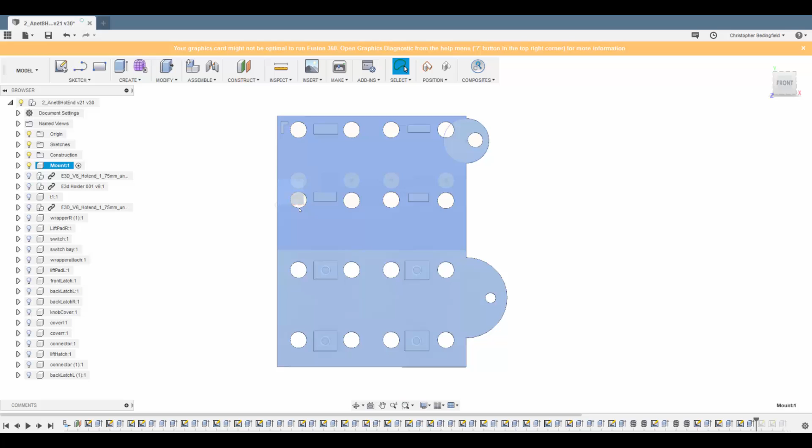So this bracket mounts to the two X brackets that are on the Anet. This is the bottom X bracket. There's a single one in the middle, and I'm just going to mount it to this side. And there's two on that top spindle, so this is going to mount there.

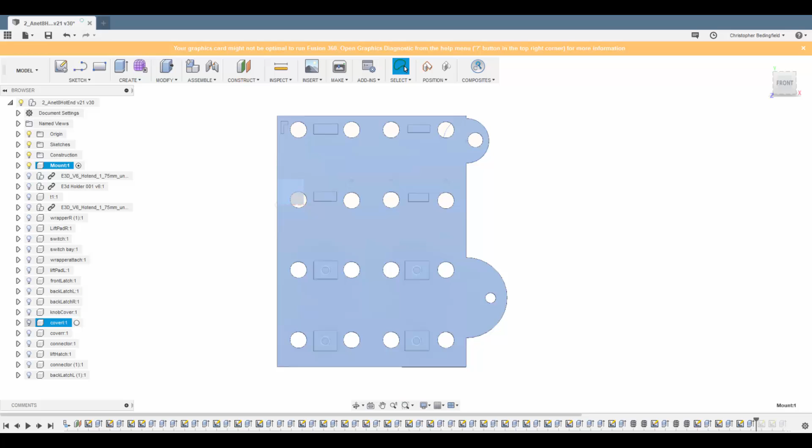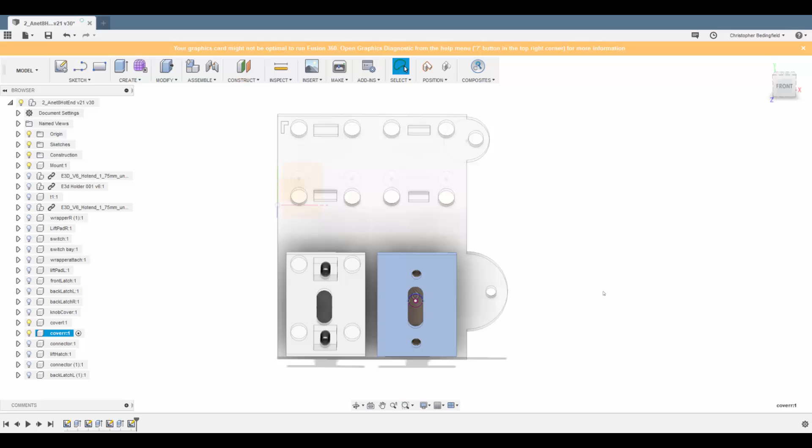And then what we're going to have, so I can do this correctly, we're going to have a cover which is basically going to screw into the mount. There's a left cover and a right cover, and this one has a wider hole. If you look at it from the front, you can see this hole allows for a lower position, and this hole, as you'll see in a minute, is going to allow for a fixed position. So this is T0 and this is T1, or extruder 0 and extruder 1.

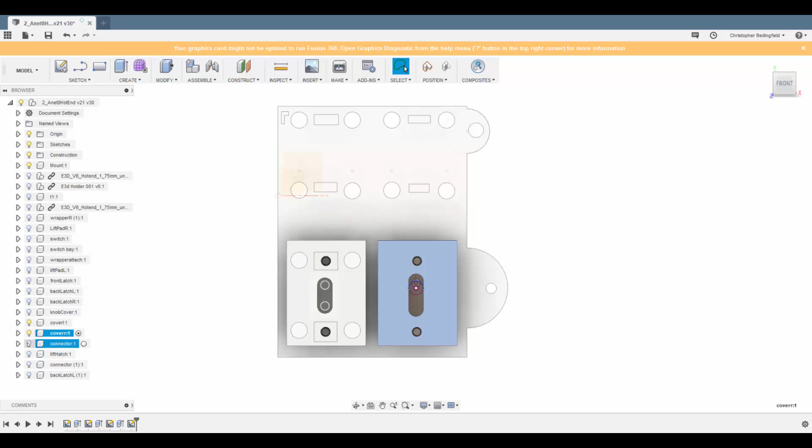This will be used for PVA and supports, or dual color, whichever you want. So now we'll show the connector. This connector has two holes that will go through, and that's why this is a fixed position.

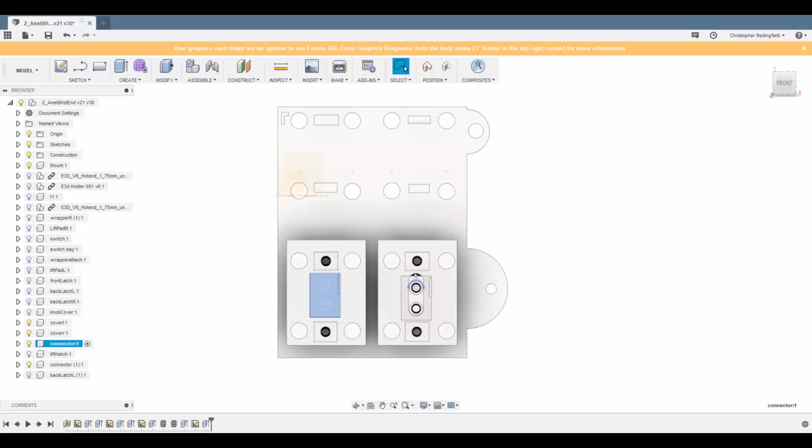And if we look at connector 1, you can see that it can slide up and down. At the bottom position it's a little lower than this one, and at the top position it'll be a little higher than this one. This will allow our extruder hot end tips to be lower when this is down and higher when this is up.

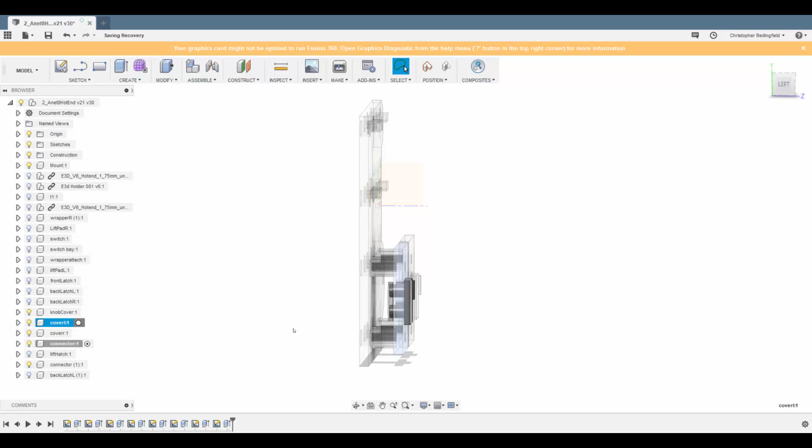Actually, it's the, where is it at? No, where's it at? Oh yep, this guy here, who will fit on the back right here. Oh, you can almost see it right here. So that'll keep that from coming out.

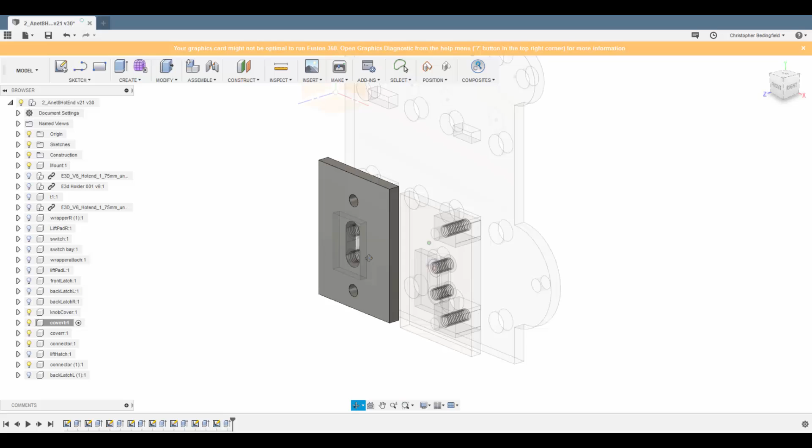May have to do some tweaking on that piece, but so now we have two movable pieces, and we have some adapters that go into them right here, and there's a little notch. This will keep this other piece vertical.

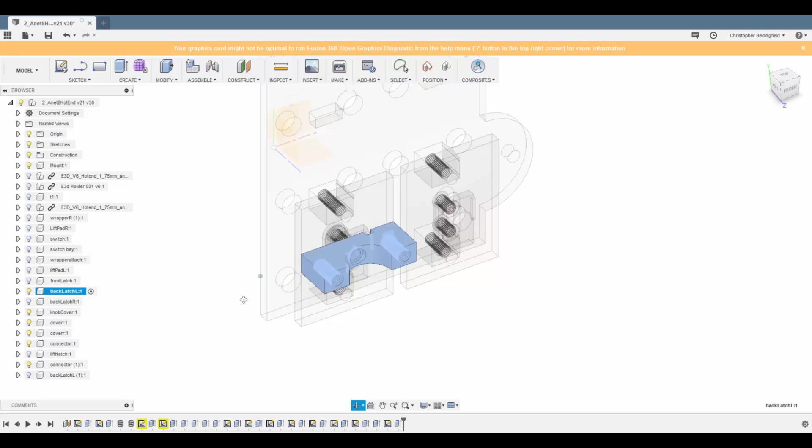So now if I go back, latch left, this is going to go on the back side of the E3D extruder, and this notch will make it, since it has a single screw to keep it from pivoting, have a little notch in here that keeps it from moving back and forth. And then there's two more threaded holes here, and for that we will use the front latch.

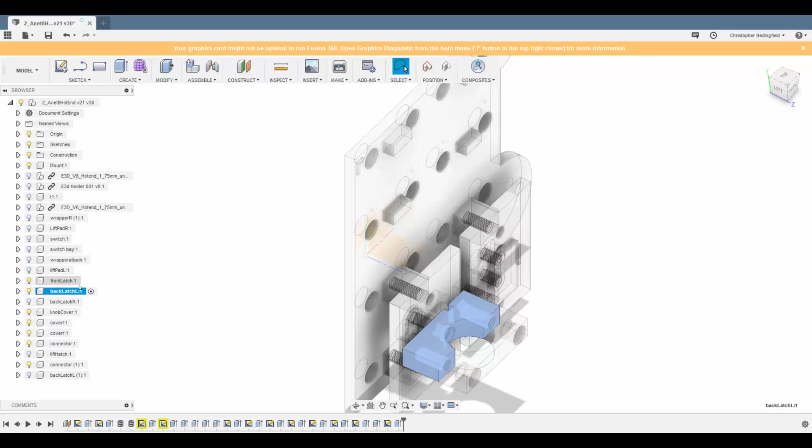As you'll be able to see here, that front latch will allow us to have an E3D extruder that goes right in here, like so. So that's kind of how that will mount. And there'll be another extruder over here as well.

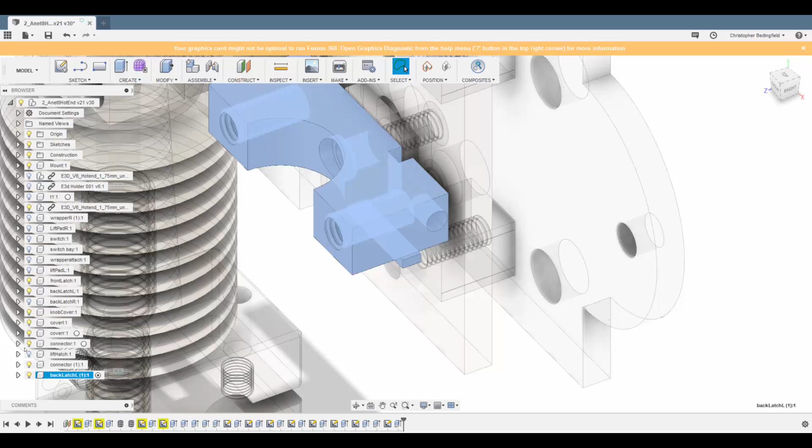The only difference being that on this back latch, there's going to be, and notice there's a little hole right here, right in here. And on there, there's going to be a lift hatch that slides in. The lift hatch is then going to have a space so that we can move this whole mechanism up and down.

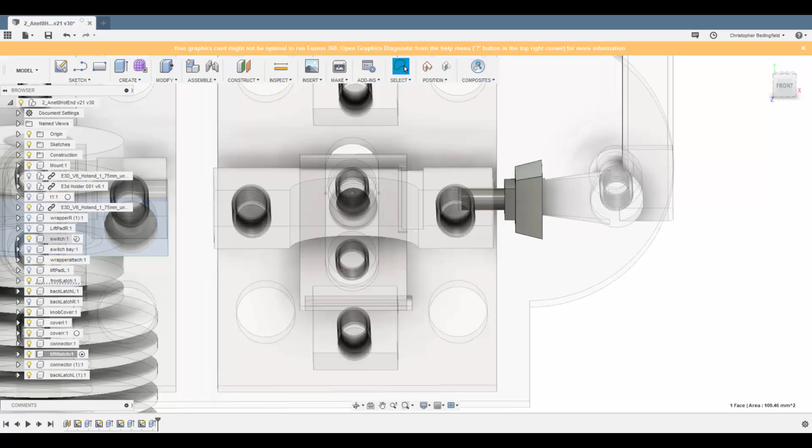Left side's fixed, right side is movable up and down. And if we bring the switch in, you can see that the switch can now control up and down based on its rotation. So it's going to mount to the mount, and it's going to be able to rotate left and right.

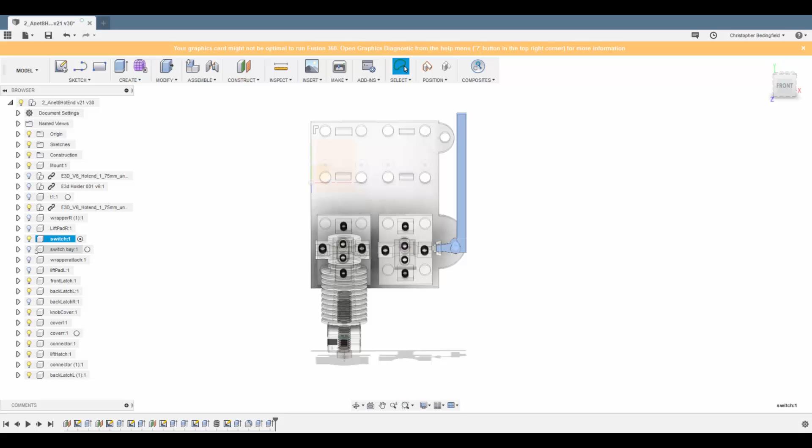So the principle here is when you want to switch extruders, you go over on the X and all the way up to the top of the printer on the Z, to where there is a switching bay. This may not be lined up right, it's not right now. The switching bay basically will...

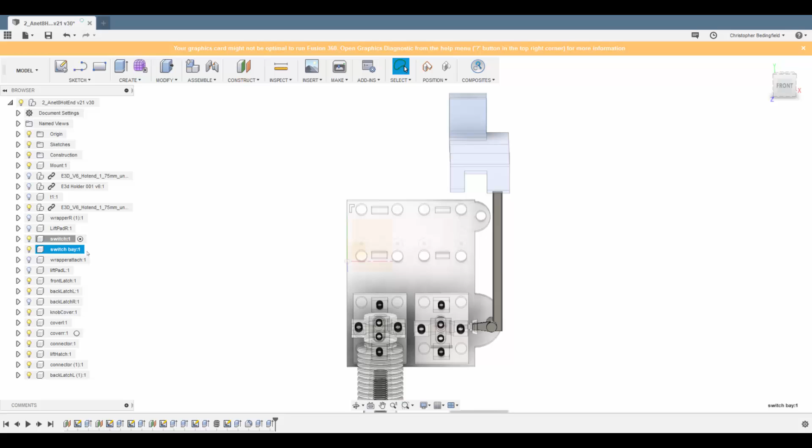Which will allow us to, basically, you get the idea here. I'll raise up the switch a little bit, so when you go up to Z, you can go left or right to raise and lower this other extruder.

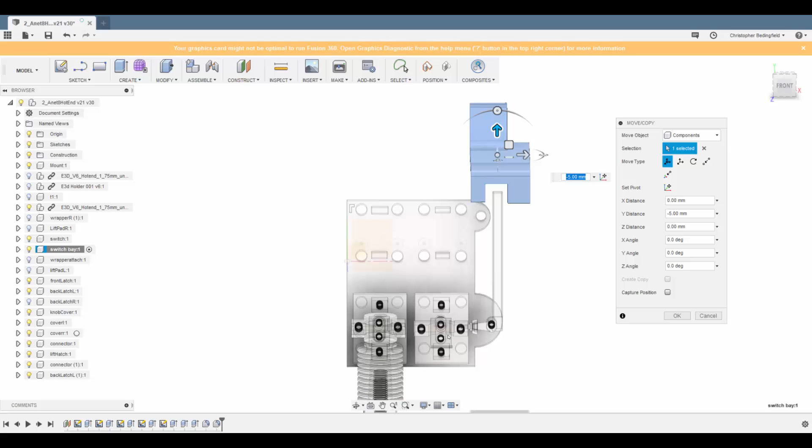So that is the principal design for dual extrusion that I'm currently working on.